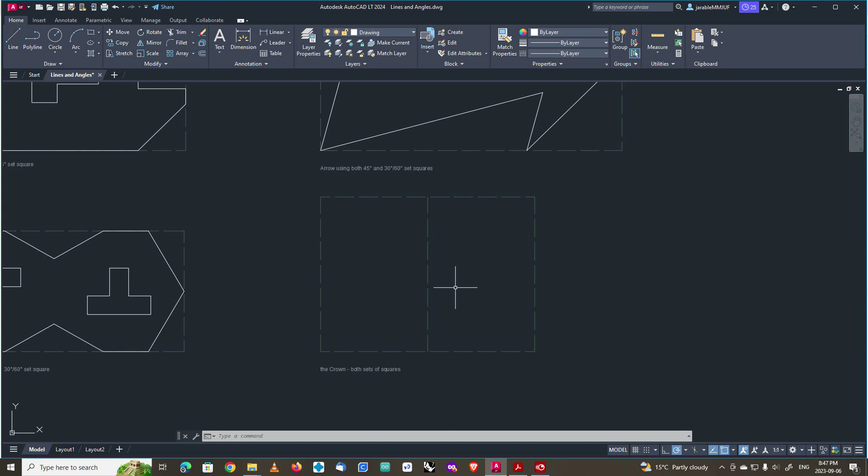Let's finish off with the crown. Take a look at this. We're going to take advantage of symmetry. We can see that one side is a mirror image of the other, and we're going to use our angle references.

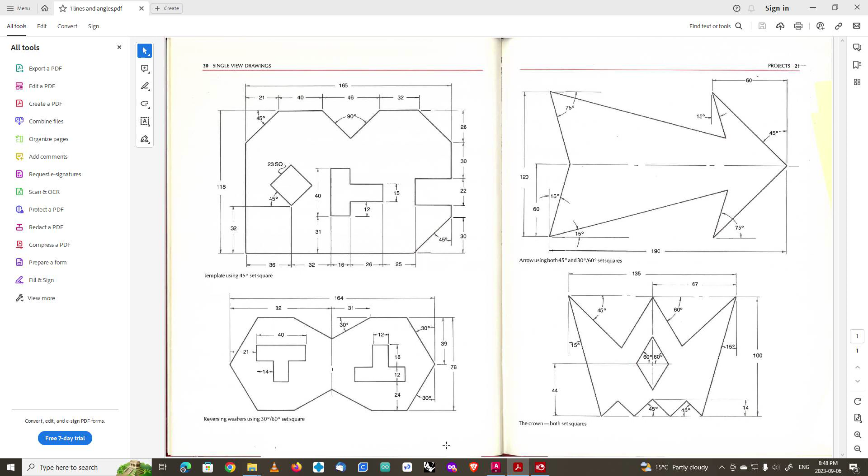The template's already been set up for us. So let's start right here. Remember the trick: we don't want to necessarily start at one end and finish at the other. We'll just start at a logical point right here.

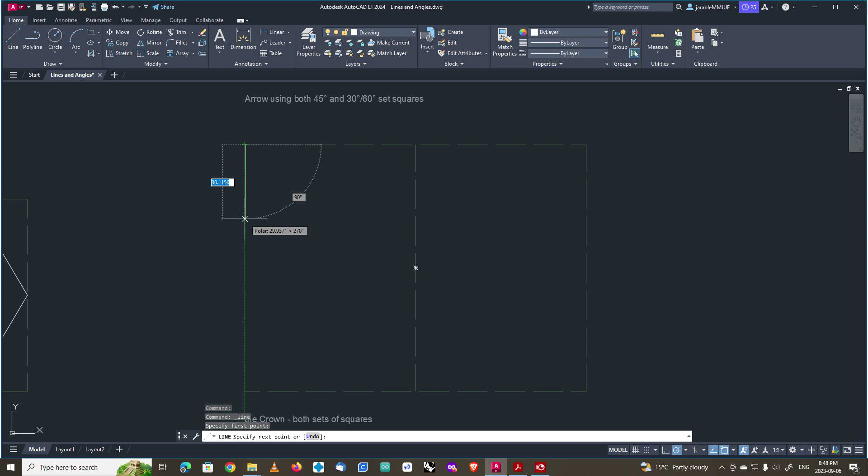I'm going to go down by 15 degrees. I know that's 15 degrees because I set my polar snapping to 15 degrees, so it's going to go out, and the first one it's going to lock to is 15 degrees. This one goes down to the bottom.

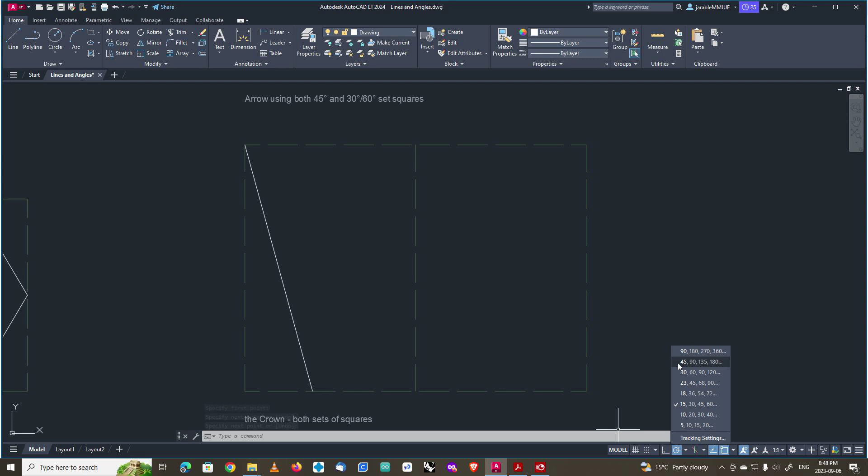That's the only one I have that is 15 degrees, so I'm going to switch this back to, let's go with, what's the next one? 45 degrees. Go down at 45 degrees.

I don't know how long this goes. I'm just going to go out to the right about there, and I'm going to trim that up afterwards. The next one, 60 degrees. I know I'm going to start right there.

So 30 degrees and 60 degrees. There's 90, so 90 and 60. Make sure you've got your angles correct. And that will stop right there.

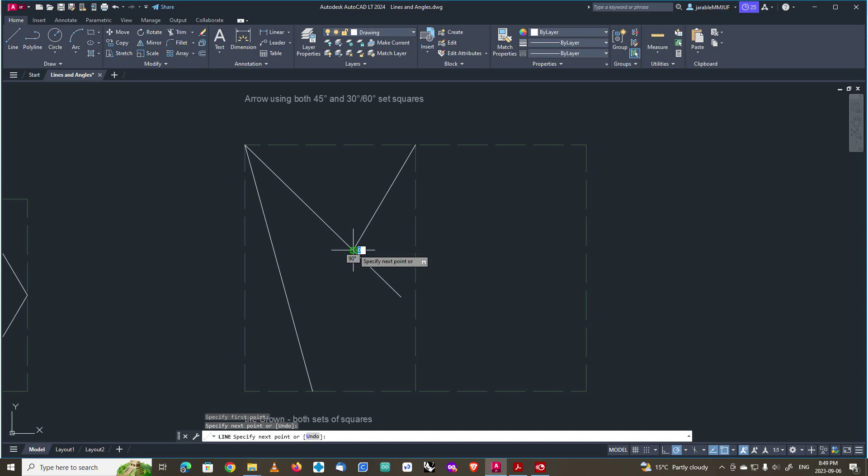I'm going to go in and trim that off a little bit. So now my angles are correct, you can see right there. So there's 30, there's 60, there's 45, there's 15.

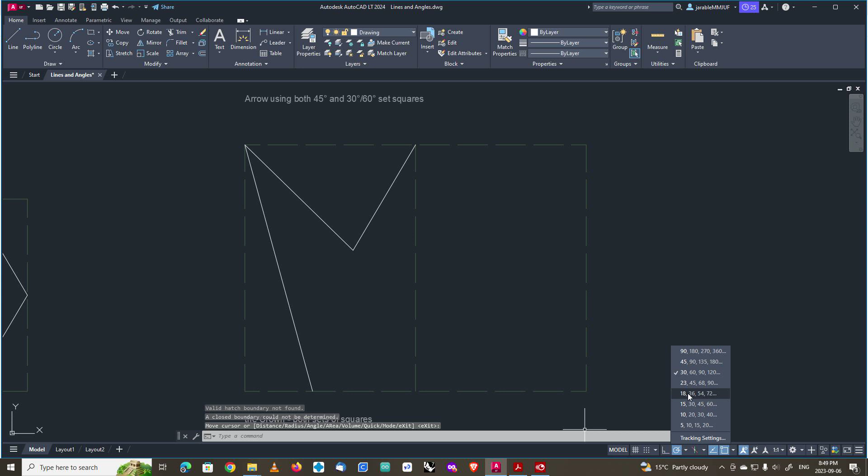The rest of them, I need some 45-degree angles. So I'm going to start right up here. Now the trick is, though, I need to go up.

14. My height here, if you look at the diagram, it says it is 14. So I'm going to draw a line here, straight up, make that 14. I'm going to use that as a reference line. Maybe I'll just drag that across there.

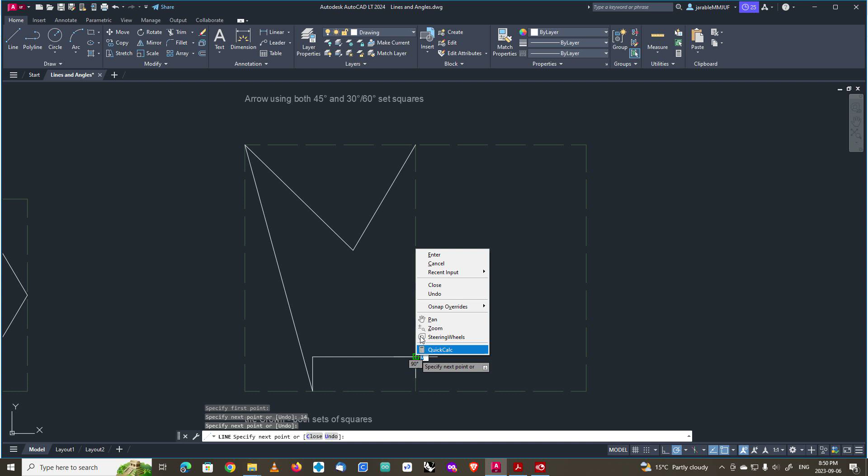So go up at 45 degrees until I hit that point. Go down at 45 degrees until I hit that point. Back up again at 45 degrees. Okay, slight problem here.

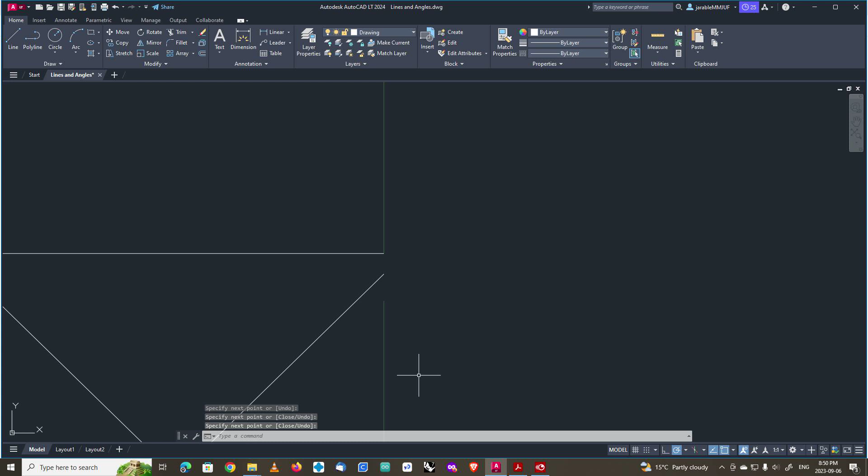That does not match my sketch. This is going to happen sometimes.

A lot of times there are actually times when you're going to be asked to make a picture or make a drawing based on something that somebody has scribbled on a napkin. I'm not joking, a lot of times engineering designs, concepts, ideas are drawn at lunchtime on the back of a napkin, and you've got to kind of figure out, oh okay, well what's supposed to happen here.

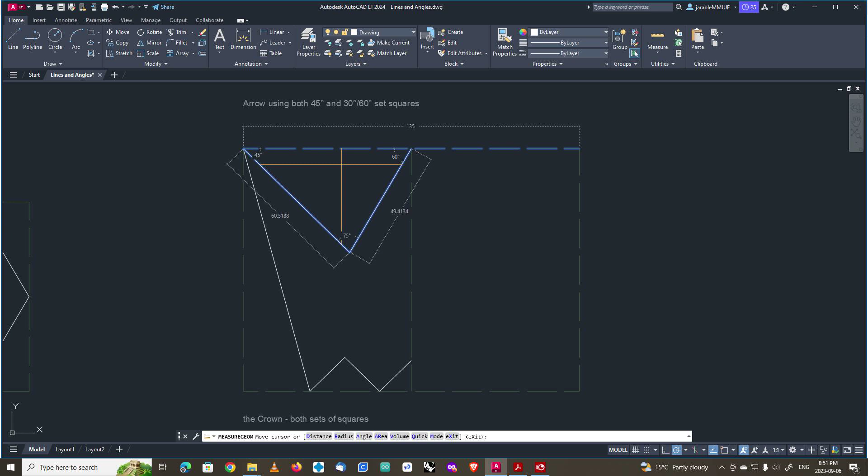So this one, even though our measurements are correct, if you take a look at all these numbers, it's actually the right numbers. Something's off a bit. So usually you will make a note of that.

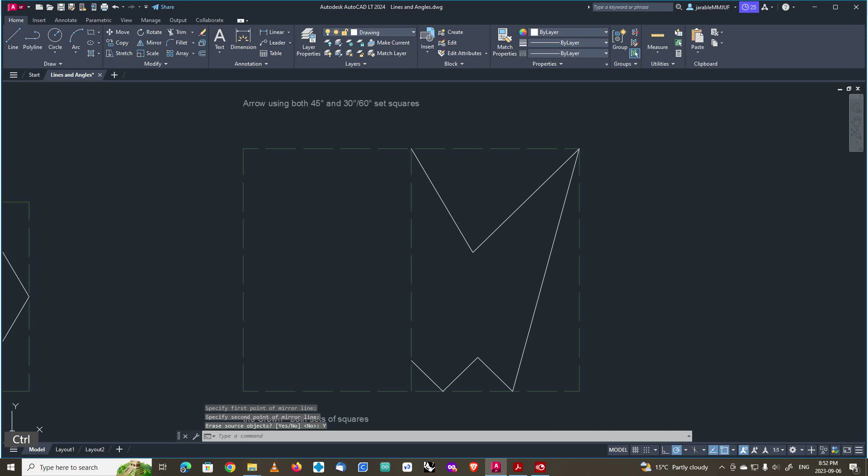I'm just going to finish this one off because this is a practice one. So we'll mirror that. Whoops, didn't want to do that. Erase source objects, no. Okay.

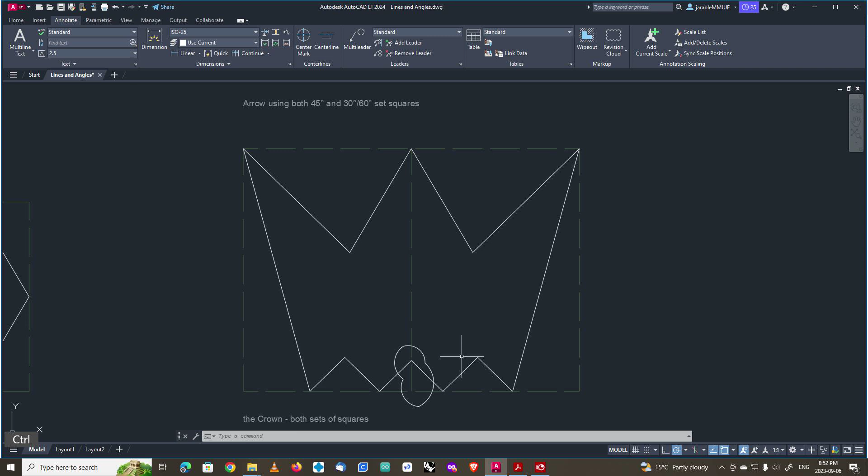I'm going to make a little call out there, and this is called a revision cloud. Sometimes it's just useful to make a little note there saying hey, something's not quite right here, doesn't quite match the measurements. You don't have to do that, but if you ever see that, that usually means there's a mistake.

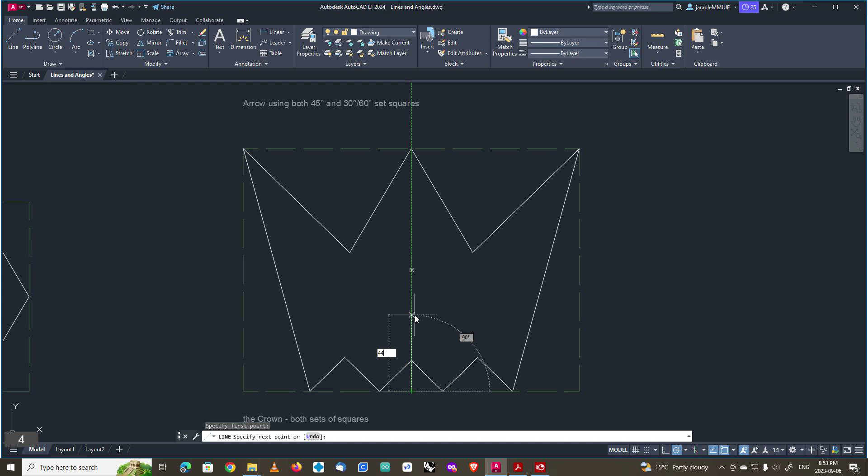Same thing with a little diamond in the center. There's no measurements aside from the distance, so the center of it is 44 millimeters up. There's no indication how big this diamond is, so I'm going to leave it up to you. Draw yourself a diamond pattern.

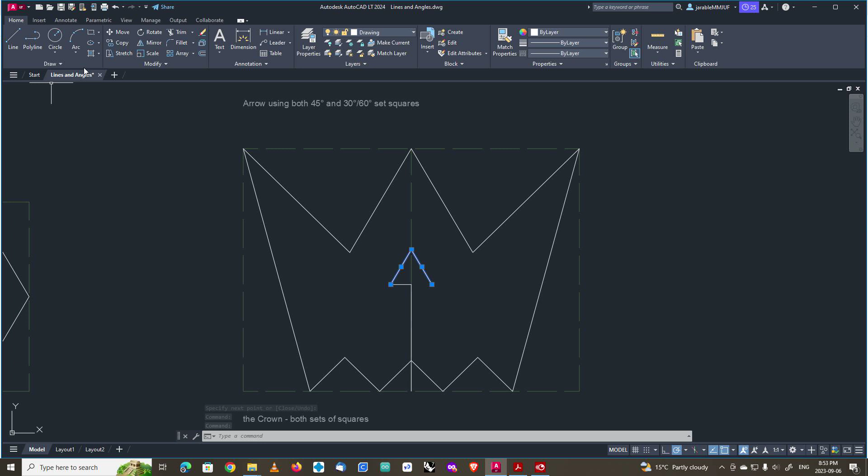But again, just sort of notice that occasionally you're not given all the information you need to draw something precisely, and you usually want to kind of make a note of that, that your plans aren't quite accurate. So, close enough, how about that?